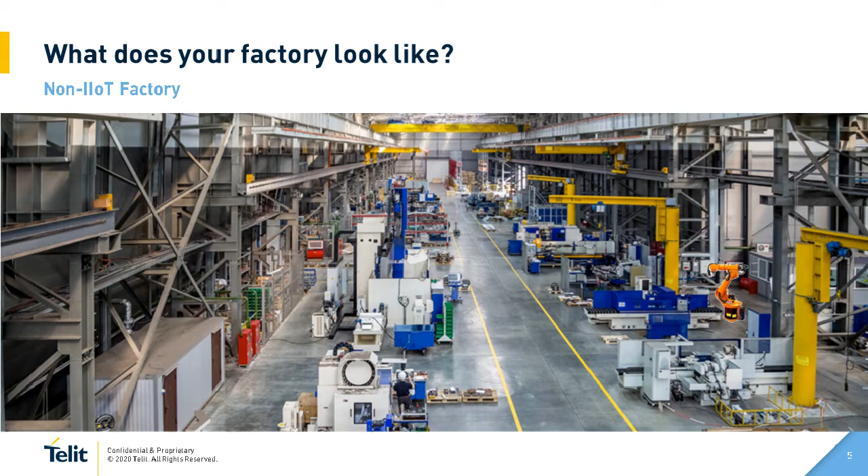But at the end of the day, what is an IoT factory? I decided to take this picture here, and this is certainly not an IoT factory, right? It just looks like any other factory out there. And now, let me show an IoT factory. This is an IoT factory. Basically, this is the same factory. What does make this an IoT factory?

Is it the AWS platform that this customer is using? I don't think so, not by itself. Is it this Rockwell controller that you have on the smart crane? Certainly not. Every factory has controllers from Rockwell or Siemens and so on and so forth.

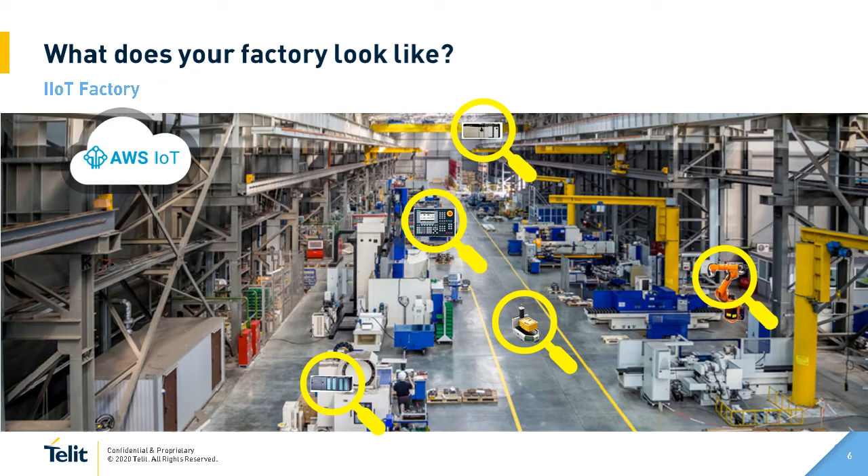Like the Siemens controller that I have here, maybe a Siemens CNC over there, maybe an AGV moving parts by itself across the line, maybe the robot that I have on the right side of my picture, maybe the people that are operating, or my ERP from SAP, my Oracle databases, and my HMIs and dashboards, still these components by themselves don't transform this factory into an IoT factory.

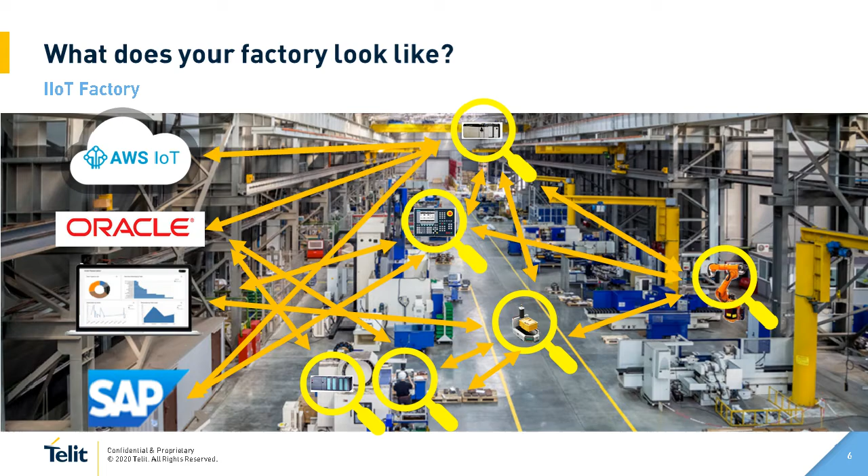What makes this factory really gain productivity is the intercommunication that we can create among all these pieces. And this is exactly what Devicewise does. So on an expanded scenario here, Devicewise, as I explained, is a software that can be installed on premises in any sort of machine, server, or IPC, and you can have this bidirectional communication and integration between machines and IT systems. You can not only collect the data, but transform this data and integrate this data. You can also build visualizations there.

But also, we like to think about two types of industrial IoT deployments. Deployments that happen completely on premises inside the four walls, or deployments that also need to go to the cloud because of the distance, because devices are not always on the same network. So for example, if you are a machine builder building machines that will be deployed everywhere, like one very simple example, a car wash machine. This car wash machine can be deployed in many different places.

You can use Devicewise running on a cellular gateway, collecting the data from these machines that are completely remote, aggregating this data, pushing this data to the cloud, having data visualization of these devices, as well as opening tunnels for you not only to see the results of the process of your machine, but also having access to your machine without the need of jumping into an airplane. So this provides the full picture of Devicewise, both for use cases that will be completely deployed on premises locally, or projects that will be deployed geographically distributed, and we have the solution for both scenarios.

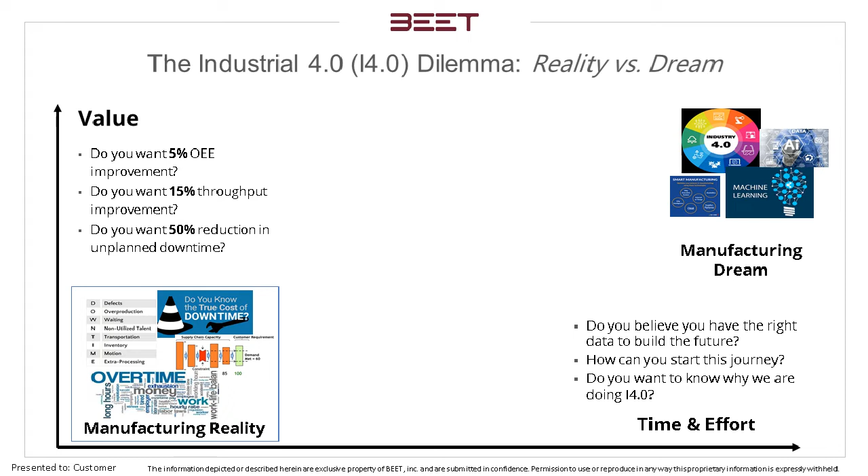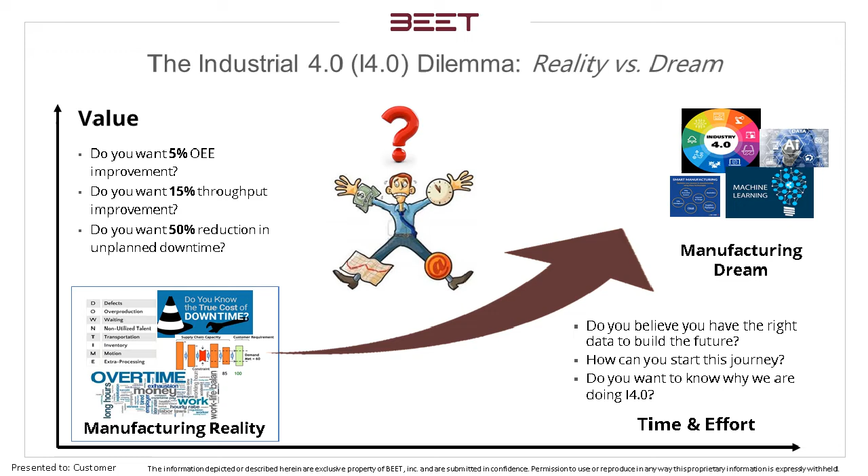On the other hand, a lot of companies today are chasing these dreams of Industry 4.0, smart factories, all this stuff. And the dilemma lies in that the people who are in charge of delivering day-to-day production goals are the same guys tasked with building this future, and they are really stressed out. A lot of times if you go to the factory floor and want to talk with these guys about Industry 4.0, they want to kind of strangle you because they say, hey, I have all these problems. Don't tell me about the dreams, right? Our goal is to help these people who are stressed out, the workers, the plant managers who have to deliver day-to-day production results. Meanwhile, they have to build a foundation for the future. So how can you do that, right?

The other thing, I don't know how many people online here ever really think about why we're doing Industry 4.0. Is this just hot air, and the balloon will be popped very soon? Actually, it's not, right? If you realize, the people you're hiring into the company today are probably all born after the 1980s. These people grew up in the internet age. They're different. They like to do their work through smart devices.

So to leverage these people's skill sets and the environment they're comfortable with, you force every company to go through this process of digitization and workflow visualization. It's something you must do. If you don't do it, you won't survive. You won't be able to keep the newer generation workers working in an environment they're not familiar with. So this is, I think, the fundamental driver of Industry 4.0.

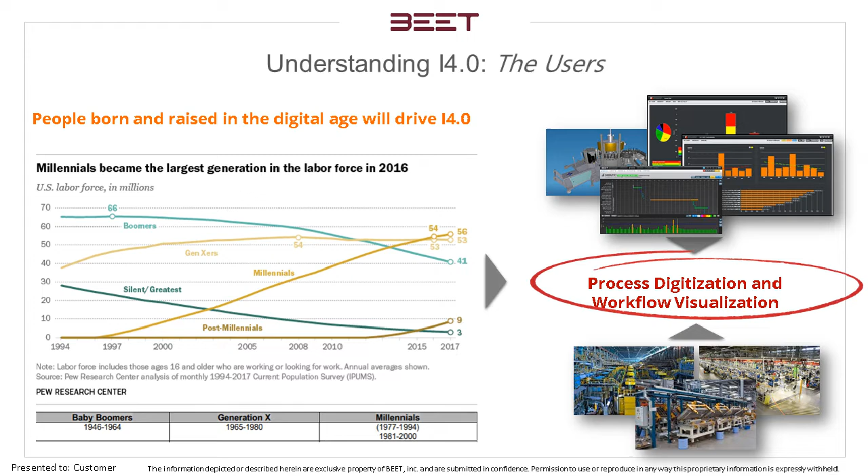The other thing we heard a lot about is data. Everyone thinks about the data. There's a lot of data today, but I'll tell you, there's more data coming. Especially with what Telit is doing, piping to more of the lines, more data is coming. It's like a tsunami, right? But if you walk away from this seminar, when you take this journey of Industry 4.0 and deal with data, you need to remember three basic things.

The first two things I think everyone can really relate to. Data doesn't equal value, okay? And bad data is garbage. I think everyone can understand that. But the next thing a lot of people don't realize is if you collect a lot of data and you don't use it, it becomes garbage very quickly. So if you collect data and don't convert it to something useful, it won't create value. You have to keep that in mind as you undertake this journey in Industry 4.0.

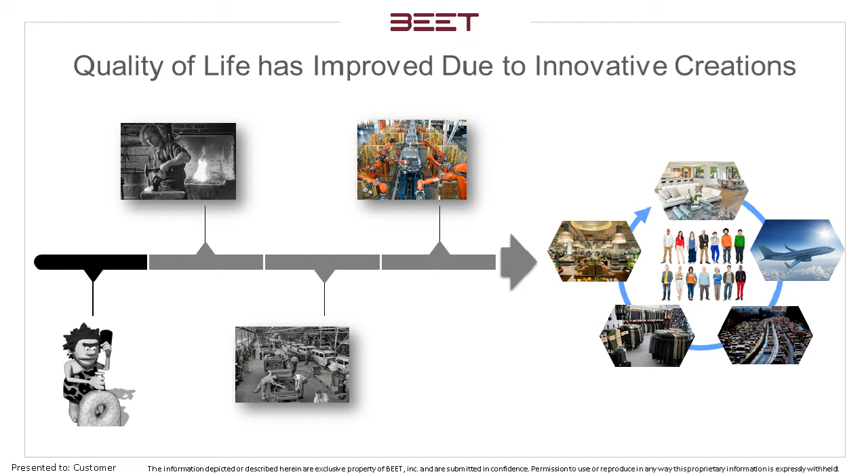Today, we live in a society that's fundamentally supported by all the automation systems around us, right? I'm going to ask a question to everyone. Have you ever thought about our relationship with the machines and the automation around us? That relationship is actually pretty adversarial, right? If we're together in a room, I always ask people, when's the last time you thanked your vehicle for taking you from place A to place B? When's the last time in your factory you thanked a robot for performing flawlessly a whole day, right?

We only pay attention to machines when they break down, right? We only do something when a clamp will not close, when the tip is broken. That's how our relationship is. We never pay attention to a machine when it performs okay. We only pay attention when it breaks down. So for us, why we wanted to create BEET is really to fundamentally change this relationship, to better connect humanity with machines and systems. I believe that's also the goal of this Industry 4.0 revolution.

So how do we do this? How can we change the relationship between operators or people and machines and systems on the factory floor? Before I jump to the next slide on exactly how we do it, I don't know how many people have ever thought about defining the manufacturing process. This is how we define the manufacturing process: it's motion events that bring functions and pieces to meet precisely in space while applying function to pieces. Why is it important for us to understand the manufacturing process? Because if you want to digitize something, you fundamentally need to be able to explain what you're trying to digitize.

So if the manufacturing process is a picture, the motion events are pixels. Use one example: if an operator is going to move a part from a bin to a nest, that motion can be done by a robot, by a slide, maybe by a smart drive. Why do you want to put that in the nest? You want to bring a function, a welding, a bending, riveting. In any manufacturing process, you are always trying to have a material and a function meet in space, and all this is enabled by the motion and events. And so what we want to do is really digitize the manufacturing process down to every motion and event.

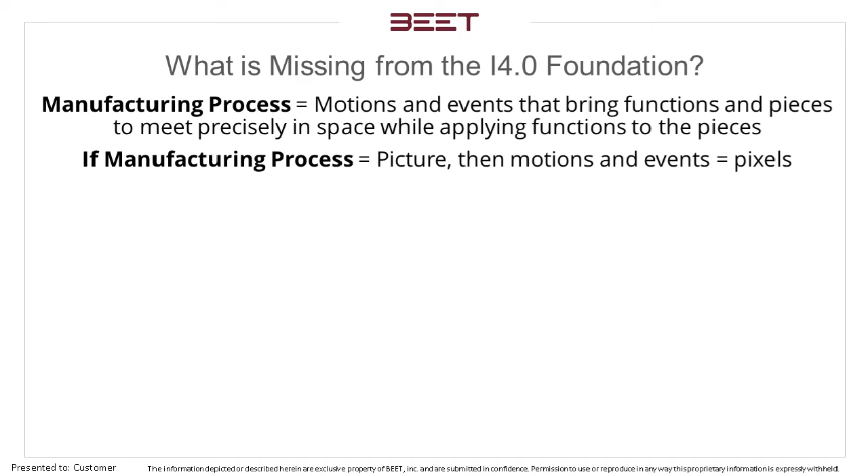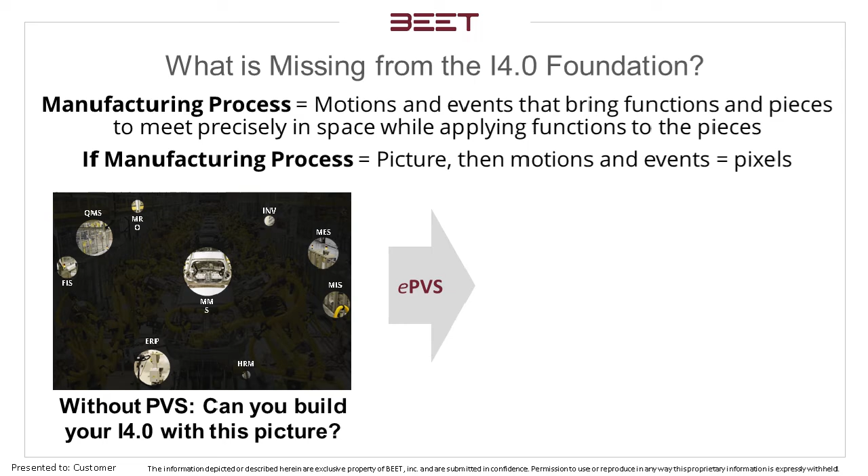So if you look at today, Ricardo showed you a lot of systems: ERP systems, inventory systems, MES systems. All these give you is a pinhole view of the overall manufacturing process. What we want to do, through our technology built on top of Devicewise, is be able to show you the complete picture, down to every single motion event, of what your factory is doing right now.

Okay, so you'll ask, how are we doing it? To compare our technology to something everyone can relate to: everyone probably knows EKG technology. Heartbeat. If I want to show anyone a heartbeat, it's kind of hard to do, but everyone has a heartbeat. EKG technology was developed to digitize, to visualize the heartbeat, something that's really invisible, intangible. To make it visible, you can compare heartbeat to heartbeat. Using that, you can detect potential heart attacks.

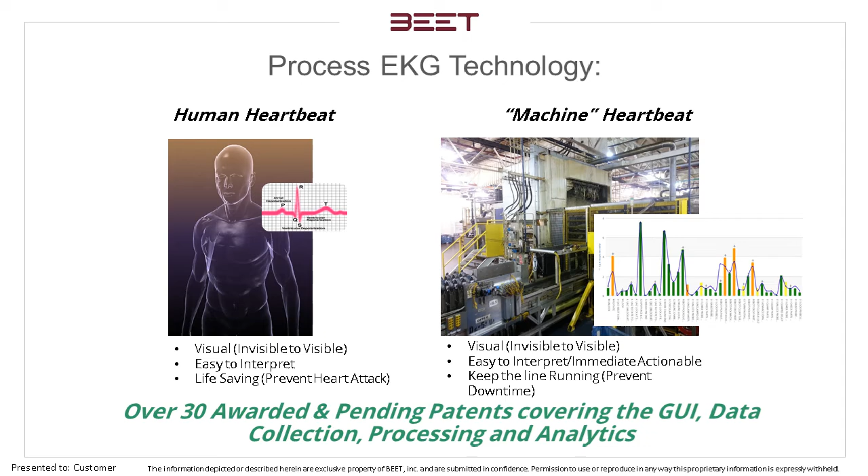I'm going to enlarge that and show you exactly what that heartbeat looks like. So I'm going to explain what you're looking at. On the horizontal axis are the steps this process will do in one cycle in 35.2 seconds. The first one, W unlock, is trunnion unlock, then trunnion rotate, reset communications, trunnion lock, and all the steps. The vertical axis is how long it actually takes in seconds to complete that step.

The blue line is what we call the ideal heartbeat. This tells me how long each step is supposed to take. The bars of green, orange, yellow show me how long that step actually takes. The issue with this machine, at the time we were implementing our technology, is it was a global bottleneck for this OEM. They were supposed to make 2 connecting rods every 35.2 seconds.

When they launched this, it was running at the 35.2 rate. But after 18 months, they were running over 40. And this line supplied 4 final assembly plants. So they were running 24/7 because of the slowdown of the machine, and whenever they had an unplanned downtime, it caused stoppages in the final assembly plants. So we were asked to come in to deal with this project.

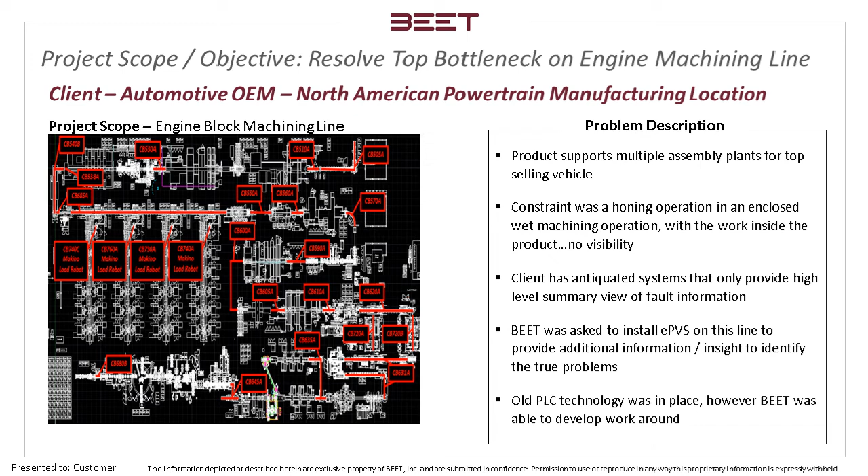So I want to share with you an actual case study, so you can see our application at work. So this is a machining line. It's a block line. It's a very massive block line, and they are having issues with throughput with this line. And we installed in the final finished portion of the line, and this is basically a layout of the system. And like in a normal machining line, they have two machines because of the cycle time required. Two machines doing the same thing.

So what do we address? Okay. So we are BEET. We create a system called Envision Process Visibility Systems, and we try to really answer 3 questions for you. Okay, what's wrong now? What might go wrong? And where's the hidden capacity?

I know a lot of people can do the first one. Really, you probably have a factory information system already, and you will know exactly what's wrong now. But the other 2, it's really, in a way, has been a holy grail for manufacturing for the last probably 30 years. What might go wrong and where's the hidden capacity? As you can see through the example and the case study we show you, we can really detail down to every motion, every second, how you spend your cycle time and where you can find the optimization. Okay.

How we do it is digitize, visualize every device motion events. And what we produce is this tool, this platform called ePVS, really is try to change how you people understand, interact, and use and manage your automation systems. It's really create a new culture. So we believe what we have created, because we digitize down to every single motion event, will be the foundation for this Industry 4.0. Without doing it, you really cannot go anywhere.